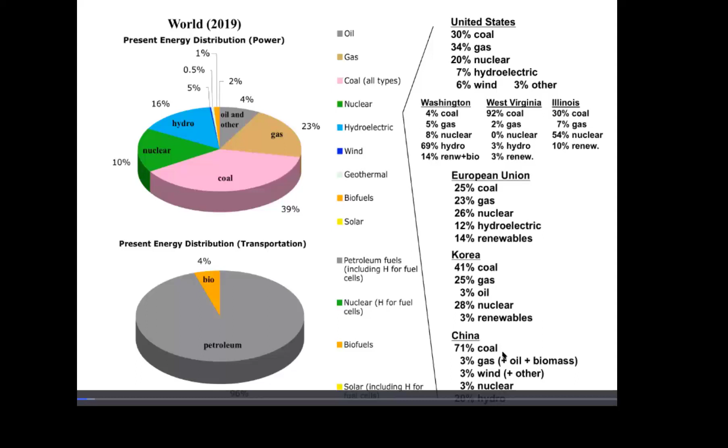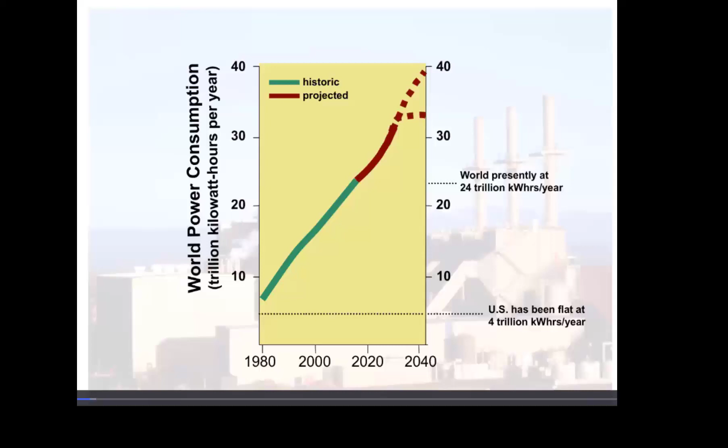So this is the world power consumption growth curve. It's very steep. It has nothing to do with the United States. The United States was last century. This is the new century, and it's everyone else but us. Presently, the world is at 24 trillion kilowatt hours. If we look at where we're going, are we going to go up ad infinitum? We're going to turn over, and I suggest about 33, 35.

So if we look at fossil fuel right now, which is 2/3 of the present 24 trillion kilowatt hours per year, if we're going to go to only 33 or so, we're going to have to come up with a huge amount of non-fossil fuel, more than all the fossil fuel we have now, simply to get to that point. That's not even cutting back any fossil fuel. So this is a huge lift, and this is what it's all about. These numbers are big, but you really need to keep them in mind.

And you have to do it all. You just can't do it in one country or another or one state or another. It's a good thing to start, but if you don't reach a significant amount of the world, then you're not going to reach this goal. Now, the reason that curve is so steep is because of these people. 1.2 billion people still have no access to electricity whatsoever. 2.4 billion people still burn wood and manure as their main source of energy, and 3 more billion are going to be born by 2040, 2045. So that's a lot of people.

And you could say, well, forget about them. We have ours. We don't want them to have any energy, which is actually kind of mean because it turns out it takes about 3,000 kilowatt hours per person per year to lift someone up out of poverty. It's what it takes. Nothing else really will do it except energy.

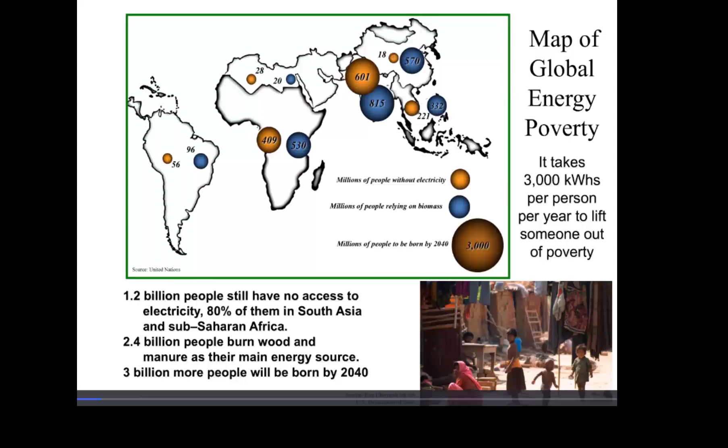So what all the climate meetings are about, especially COP21, was pretty much how to give these people 3,000 kilowatt hours per person per year without giving them coal, and then who's going to pay for it. All the other discussions were subsets of that. And it turns out this is the only way to eradicate global poverty and its evil stepchildren, war and terrorism.

So we have this basic dynamic tension between humans and the planet, and the humans simply want to live nicely, and the planet wants to survive. So we're often crosswise to that, and you simply have to find a way to do it correctly. But it's really an ethical issue: should you try to prevent people from getting 3,000 kilowatt hours per person per year, because that lifts them out of poverty.

Now, the nice thing about that is when you lift them out of poverty, the birth rate plummets. And so the best birth control in the world has always been access to energy. That's why the aristocracy always died out. Now, this is not secret. We've known this for many years. Google the United Nations Human Development Index. It's really a neat concept. And it turns out that the first term in the equation of happiness is access to energy.

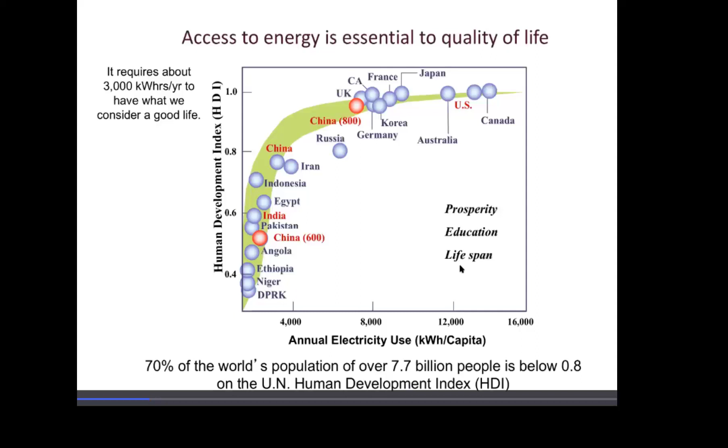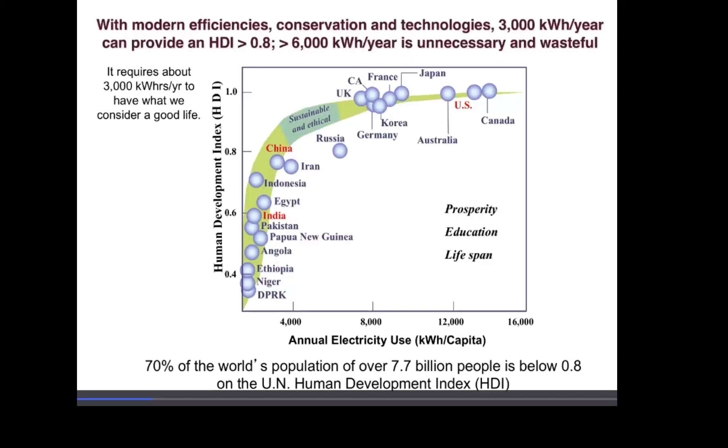Now, there is a sweet spot here. If you can get everyone down to about 6,000 kilowatt hours per person per year and everyone down here up to about 3,000, you can eradicate global poverty. And again, its evil stepchildren, war and terrorism. It's pretty much the only way to do it. And that's why energy use is going up and up.

So what do we need then if we're going to achieve socioeconomic parity and a good life for everyone, and that's what everyone is aiming for, independent of climate issues? Well, we've got to cut the industrialized world down to 6,000 kilowatt hours per person per year, kicking and screaming. That's okay. We don't need 10,000, 12,000 kilowatt hours a year. That's wasteful. But there's only about 1 billion people in this subgroup. There's a bunch at 3,000. Keep them there. That's great. We need to increase these two groups, the developing world that has 5 billion people in it, and those coming on board by mid-century, which is another 3.5 billion.

So we're talking about 33 trillion kilowatt hours. So that's why I mentioned that number. Now, this is if you equitably distribute the energy amongst everyone in the world, and we're not very good at that. So it'll take more. I would guess about 40 trillion kilowatt hours if we're going to achieve peace and prosperity in the world. Now, there's a lot working against that, but that's the goal. That's the goal from the human side.

Now, what about the goal from the planet side? This is climate change for the last 550 million years. I apologize for the busyness of the slide. In order to get 550 million years on one slide, the legend changes slightly. So over here, it's thousands of years, then hundreds of thousands, millions, tens of millions, hundreds of millions. So it's compressed as you go back, of course.

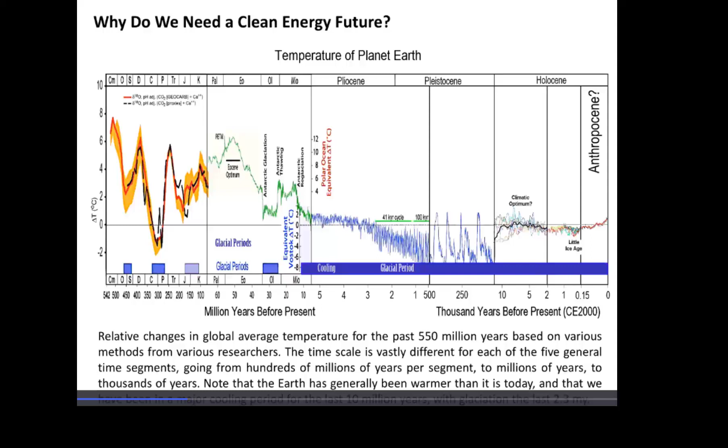So if you look at, I apologize again for all these graphs without taking the time to derive them. If you look at the IPCC's modeling, most climate modeling, you have two end members. You have A2, which means you don't do anything, business as usual. And you have B1, which is we do everything we possibly can. And as you can see, neither one's great. I mean, A2 is really horrible.

So if we don't do anything and we're business as usual, if we're still 2/3 fossil fuel in 2080, we're in rough shape. But even B1, we do everything we possibly can, we're still going to go up 2 degrees C, or 3.5, 4 degrees Fahrenheit. And all we're trying to do here is increase this difference. So we're trying to be as low as we can, but we're not going to get back to 1850. Just not anytime soon.

And you all probably know why: because the half-life of CO2 in the atmosphere is anywhere from 30 to 300 years, depending upon the degradation route. So that's tricky. So again, when we talk about COP21, Paris, or any of the others, pretty much the big question is who's going to pay to implement B1? That's the big issue. Who's going to pay for it? How are we going to do it?

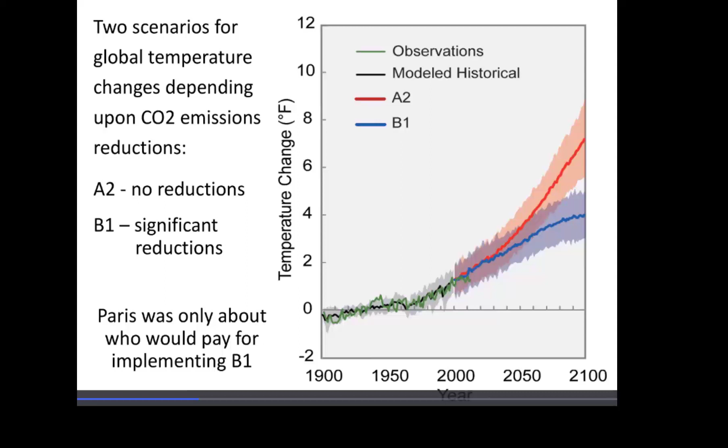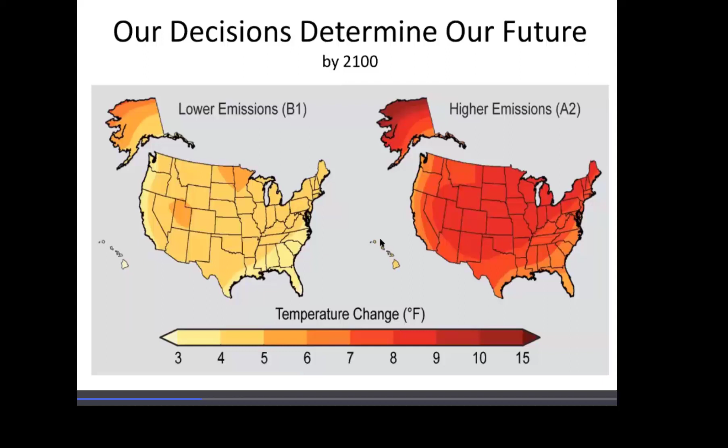Now, you probably also encountered people that say, well, if there's more CO2 in the atmosphere, things grow better. It's like, no, they don't. All things equal, they will, but all things are not equal, because the temperature has much more effect on the yield of a crop than the CO2 concentration. So as the peak temperature during the growing season goes up, the yield goes down significantly.

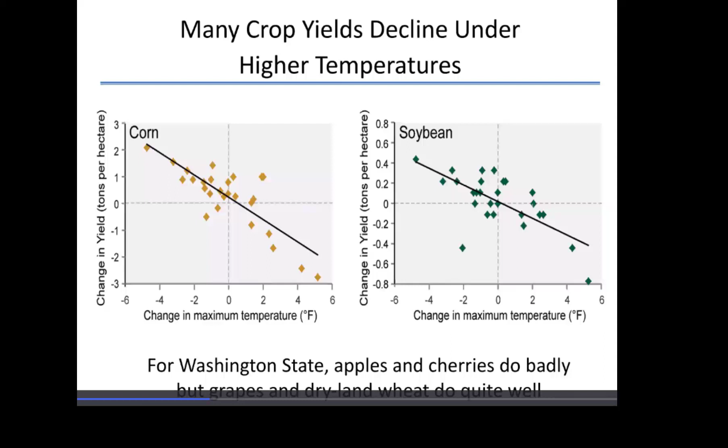So for Washington State, it doesn't matter, A2 or B1, apples and cherries do badly, which is horrible because we are the biggest exporter of apples and cherries in the country, if not the world. But grapes and dryland wheat do quite well. So the wine industry is fine. Don't worry. But yeah, so again, as this all evolves, of course, you have to make smart choices on what kind of crops you're going to grow. And in the Tri-Cities, that's important. In Washington State, it's incredibly important.

Now, last climate slide. This is the IPCC's projections of how to get to B1, how to keep the climate change to within 2 degrees Celsius. So what that means is that in 2011, we would have had to be decreasing anthropogenic carbon emissions by almost 4% per year, but we could still have some by mid-century. Well, we blew that one. So 2015 comes around. Now we have to decrease 5% per year, and we have to go basically to zero by 2045. Well, we blew that one.

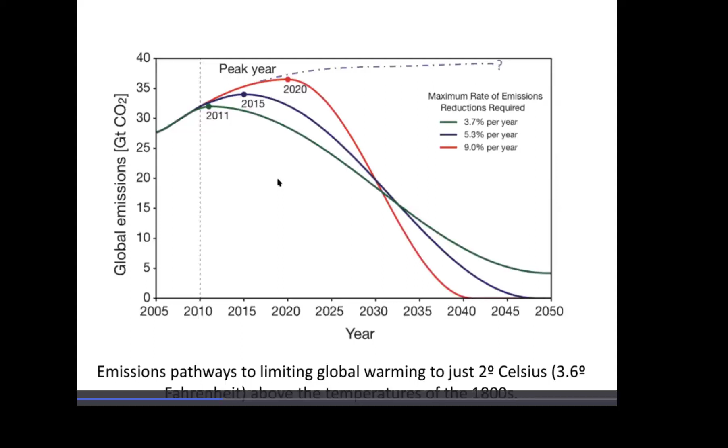So now we're in 2020, and we're supposed to decrease carbon emissions by 9% a year and go to zero by 2040. That's why everyone says we only have 10 years, because, yeah, we only have 10 years. And that's a pretty big lift. So, again, if we weren't all muted, I would ask, so how much have we been decreasing a year? And everyone would answer, none, because we are not decreasing, and this is very bad. In fact, every major projection I've seen has us going up at least until 2045. And that's ridiculous. We can't do that. We will just fail if that happens.

We can't have these, but if we throw these out, if you don't like hydro, you don't like nuclear, you don't like geothermal, you don't like wind turbines on Horse Heaven Hills, if you just don't like something and you say, well, we don't need that, then you really are not paying attention to the numbers. The numbers say we need all of these as much as possible. So that's what the rest of this talk is going to be about.

And again, if you talk to Jim Hansen, Kerry Emanuel, all the big climate gurus, pretty much they say you cannot do this without nuclear energy. They should have also put in there, you can't do this without solar, you can't do this without hydro, you can't do this without any of these down here. Okay.

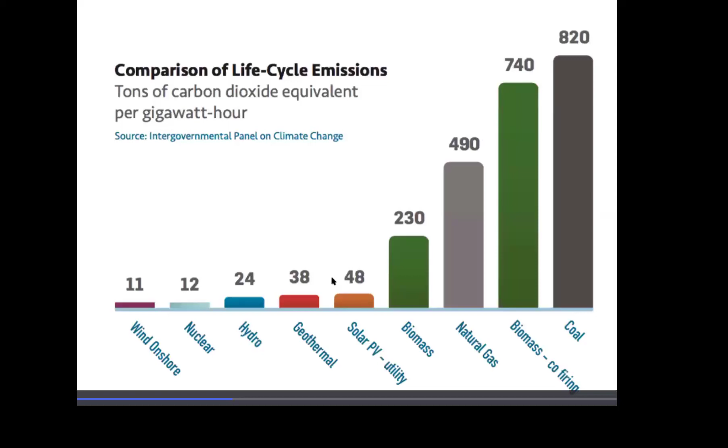Now, of course, a lot of people say, well, we've been pretty good in the United States at decreasing our CO2 emissions. We're at a 27-year low. Yeah, I know that, but it has nothing to do with what we think we're doing. It has to do with replacing coal with natural gas. We've been doing that dramatically.

And again, it actually went up for a little bit in 2018. And of course, the pandemic is a horrible reason to decrease, but it's also decreased. But that will turn around. So again, this is billions of tons of emissions from the United States, and we're continuously going up. And then we started in 2006, and I'll talk about why that was the case, started decreasing significantly as a result of replacing coal with natural gas.

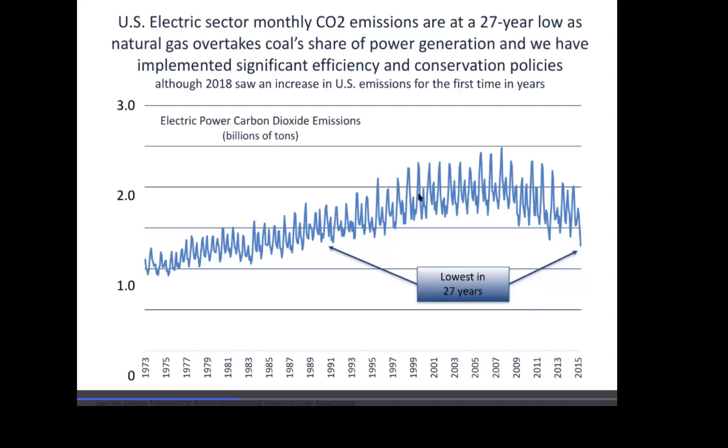And the reason is because we have an awful lot of natural gas. We have an awful lot of everything, actually. We have more fossil fuel than any other country in the world, period. Much more. And that's because in the old days, in the 70s and 80s, when we were in college and graduate school, we'd have to calculate the Hubbert curve, okay, the peak oil, peak coal, peak gas. And peak oil, and peak anything, is calculated only for those things that are economically recoverable at that time.

Okay, so in 1970, we would drill a well, and that's it. Okay, now beginning in 2006, we started drilling multiple wells, so we started fracking. So we would have 12 stringers out from a single well. And it just got too easy to get the stuff out. And as a geologist, I never would have thought we'd get anything out of tight shale. I mean, you just couldn't get anything out of it. Now we can. So things change. Technology changes things dramatically. In this case, it's changing it for the worse.

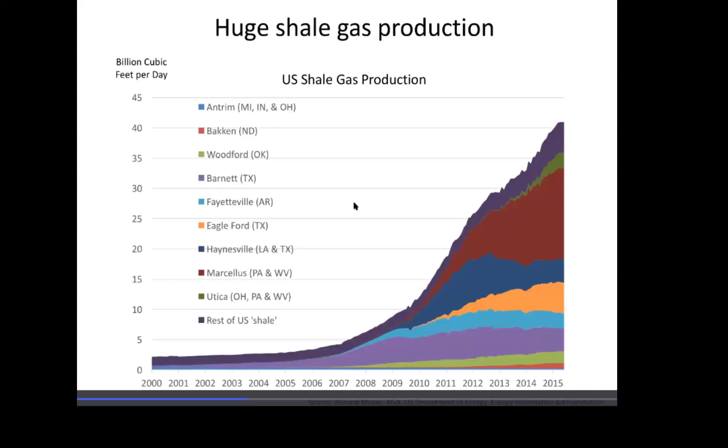I just want to throw in, this is a Patterson drill rig. It's a walking drill rig. Now let that sink in. This thing picks itself up and walks to the next site. Now, from a science fiction standpoint, that's great. It's really cool. From an environmental standpoint, that's horrible. Okay, it means it's even cheaper and easier now to get stuff out of the ground.

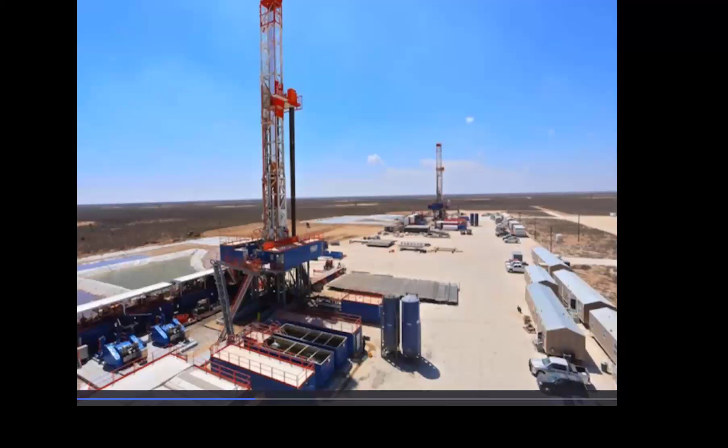And each one of these puts down a well 18,000 feet, and then can put 12 stringers off into a mile. Now, it's just too easy to get the stuff out of the ground. So you cannot wait for the idea that it's too hard. We're running out of oil. We're running out of gas. We're not. We won't run out. The peak oil is now 500 years out. We just have so much oil that no one has ever thought we could get out of the ground. That's what's key here. So it's going to take a political will that is really massive to counter the fact that it's so easy to get this stuff out of the ground.

So with that, I've set you up. What's the fastest growing energy source in the world?

I usually say, just shout it out. Can you unmute everyone, Steve? Or can I unmute everyone? Well,

I'll give you the answer. Terrible. It's oil. It's oil and coal and gas as well. So, I mean, this is terrible. This is not the direction we need to be. Okay, now renewables are coming up. That's great. I love it. But they're not coming up anywhere near as fast as fossil fuels. And you might say, well, why is that the case? This is the world now. This is global. This is not the United States, although gas is leading the United States as well.

It's because, especially coal, it's not the cheapest source of energy. But if you are a poor country with no infrastructure to speak of, coal is all you can do. It doesn't require a lot of infrastructure. Every single other source requires significant infrastructure. So right now, China's One Belt, One Road policy, you probably heard of that, they're spending almost $2 trillion on infrastructure in Africa and Southern Asia in order to install coal. Because it's easy, and they have a lot of coal.

They want to sell it, and they want to economically and politically bind these developing countries to them. And this is the best way to do it. I mean, it's actually brilliant. Horribly brilliant, but it's brilliant. So again, coal is simply easy to do. It is not the cheapest. It's simply the easiest if you have no infrastructure. Natural gas, you need pipelines; renewables, you need high voltage transmission lines. I mean, you need a lot of things for all of the other sources. You need the least with coal. So that's something that is driving this, that is not, again, what you think of usually as why.

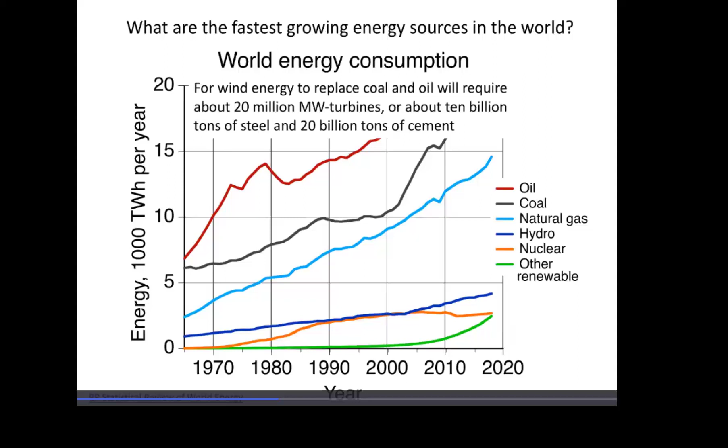The thermal sources don't require much, but just look at gas. Gas doesn't take anything. That's why you can throw a gas plant up in a year, because it just doesn't take anything. It takes 3 tons of steel. I mean, think of that, 3 tons of steel. Whereas wind turbine per megawatt takes 450 tons of steel just for one wind turbine.

So this is important. So if we're going to build the renewables out, and also nuclear, we're going to get rid of coal and gas. That means we're going to have to come up with a material plan to do this, because it's just not going to happen on its own. So you're going to have to triple the amount of iron mining, which is not trivial. You're going to have agreements that we're going to save a major portion of the steel production in the world to go to renewable sources. So again, this is not a trivial issue. To me, this is one of the great hurdles that has to be overcome in order to meet any kind of a Green New Deal plan.

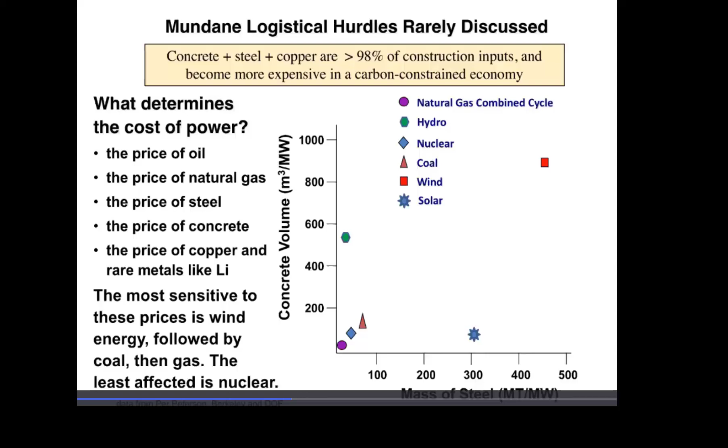So any energy plan that has any hope of achieving any of the emission goals we need in the time frame we need them, basically the green part of the Green New Deal, must have some form of the following. So I'm going to lay out what we need. And yes, it's not set in stone. I mean, when you project this far ahead with these huge numbers, there's a huge amount of slop in it. But if you don't have some sort of this, you're going to fail.

So we need to stop building new fossil fuel plants. Now that may seem obvious, but we're not doing that. We're still building a lot of new fossil fuel plants. You cannot stop fossil fuel while still building fossil fuel plants. I mean, that doesn't take rocket science to understand. The problem is every new fossil fuel plant you build locks you in to fossil fuel for about 40 years. No one is going to decommission a fairly new gas plant.

Now, coal, we're not building coal, but again, as I mentioned, the developing world is building coal like crazy, but we're not building coal, we're building gas. And you say, well, gas is a bridge fuel. Okay, bridge fuel, but bridge to what? I mean, we're talking about 2040. If you build a bunch of new gas plants between now and 2030, those gas plants are going to be running in 2040, no question. So you have to stop building new ones. And that's going to be tough because that's all state legislatures like, is natural gas.

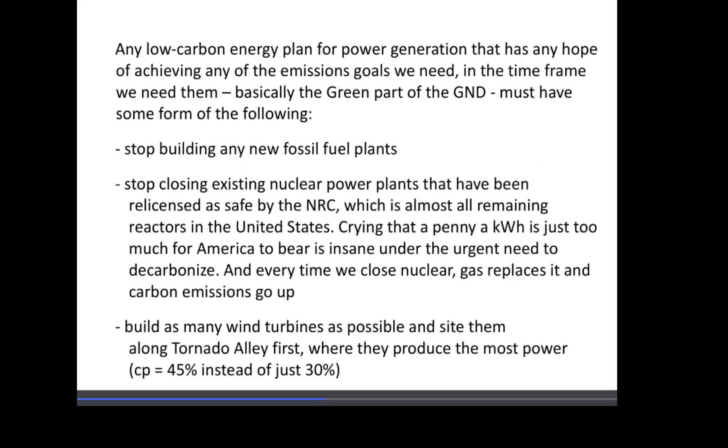Now, do you all know what capacity factor is? Okay, it's the percentage of the time that the power plant is producing what it's supposed to produce. So a 1 megawatt wind turbine produces 1 megawatt if it's turning at 30 miles per hour all the time. That doesn't happen. But out here in the Horse Heaven Hills, the capacity factor is about 27%. In Tornado Alley, it's 45%. So you're getting a lot more energy out of the same unit, out of the same amount of steel, out of the same amount of time. So that's why it's important to do that.

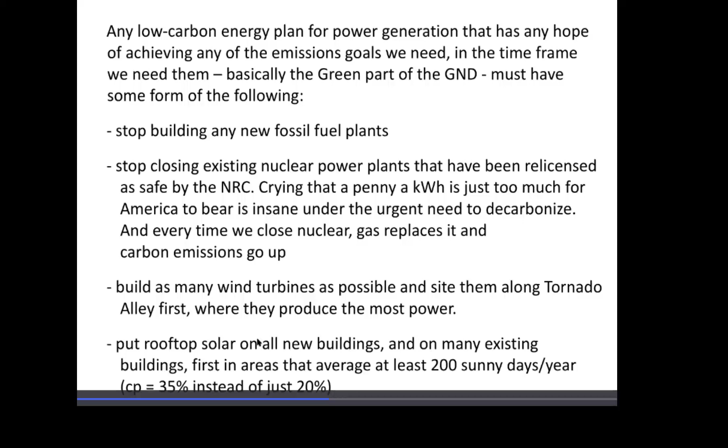So the same thing with solar. Put rooftop solar on all new buildings. If you put solar on a new building and you amortize the cost of that over the mortgage of the building, you won't even feel it. Now retrofitting, I retrofitted my roof with solar panels. That's fairly expensive for most people because you're retrofitting it. But if you put it on all new buildings, you won't even feel the cost of that. But again, you need to do it in areas that have a high capacity factor, at least 200 sunny days a year. So we're talking about the red and orange.

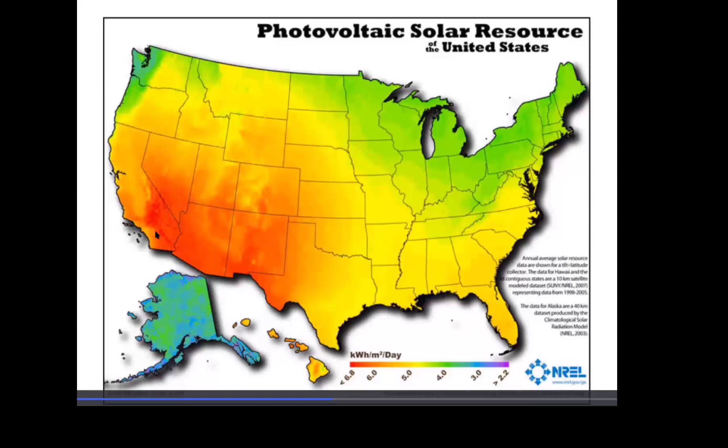Okay, now here's Tri-Cities. That's why mine's okay. That's why the new solar array that's going up for Energy Northwest is going to work very well. But if you're putting solar panels out here or up here, you're wasting steel. And we don't have a lot of steel to waste. Certainly don't want them in Alaska.

And build small modular reactors as fast as possible. They can't melt down. All the scary stuff has been fixed. We have not been idle in the last 30 years. And SMRs are built to load follow or buffer renewables instead of building new natural gas plants. So it's either SMRs or gas or hydro. That's all you have to load follow. Now, Texas actually load follows a bunch of their wind farms with coal, which is horrible. Ramping coal up and down is really dirty.

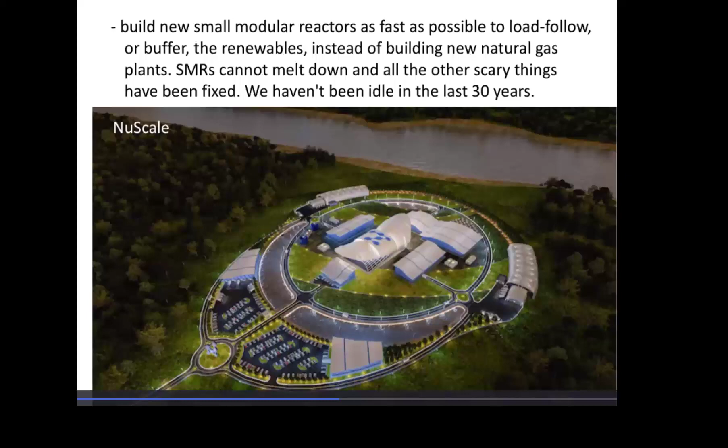And of course, you probably heard of NuScale down in Oregon. Brilliant, it's already approved. Been there lots of times. Again, it's great. And the first one should be built in Idaho, basically to load follow the wind farms of the Utah public utility, UAMPS.

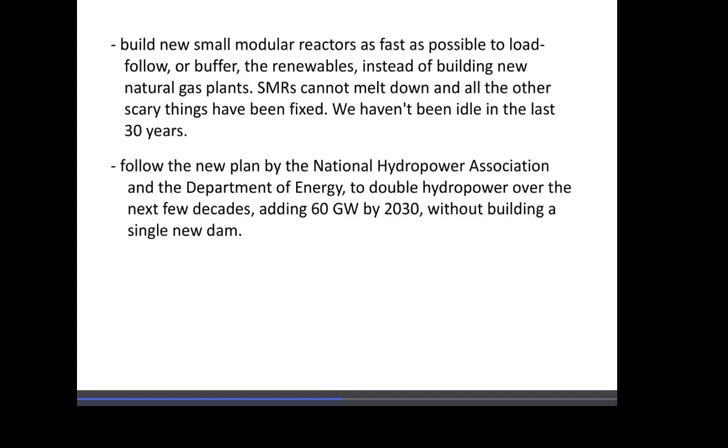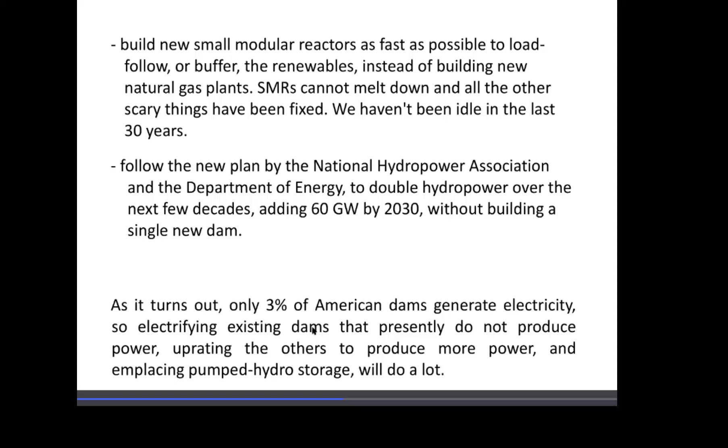It's either natural gas, small modular reactors, or hydro. Those are the only things you really can load follow correctly, given the intermittency of renewables. So if you're going to start building a bunch of renewables here in Tornado Alley, you better have a bunch of hydro or a bunch of small modular reactors to load follow them, to buffer them. Otherwise, it's just going to be gas.

I mean, you probably remember T. Boone Pickens. He recently died, but he was touting wind. He was a gas man. I knew him from a long time ago. He didn't care about the environment. He didn't care about the planet. He bought up all the water rights in Texas along the areas that were going to put wind in because he's a gas man. He knew when you install a significant amount of wind, you need gas or hydro or small modular. So, if you don't do this, you'll have much less ability to load follow the renewables you have to put here.

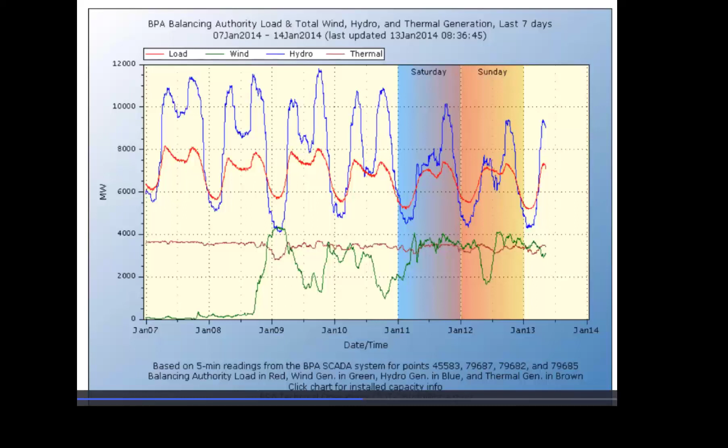So when wind comes up, suddenly you have to drop hydro dramatically, and when it goes away, you raise it up. So we only use hydro in this region to load follow renewables. So hydro is a really great thing to have. If you're going to be putting in a lot of renewables, hydro is great. You can't start taking out hydro thinking, okay, we don't like hydro, so we're going to take that out. Well, then you're going to be stuck with natural gas, and you'll never reach your carbon goals at all.

If we're going to build alternative electric vehicles, which are the best? I mean, hydrogen's okay. It's not very good. Methane is still methane. But really, electricity is the most efficient fuel for a vehicle. It's about 4 times more efficient than oil, than petroleum. So if you're going to do that, again, materials are an issue. Lithium, cobalt, iron, and other materials, neodymium. You're not going to do this unless you secure large sources of these. And right now, we buy these mostly from China.

Now, we have rare earth element mines in the United States. I used to know one down in Southern California, but China pretty much, with government assistance, undercut every rare earth element mine in the world. And so they all shut down. So again, money's important. I get it. We're America. Everyone's going to make a buck. I get it. But you need to get sources of these materials, even if they're not competitive with China. The point is not only to make money. I mean, you're going to make money, but the point is not just to make money. You simply need sources of these materials. And if they cost a little bit more in the United States, you have to bear that if you're going to meet these goals.

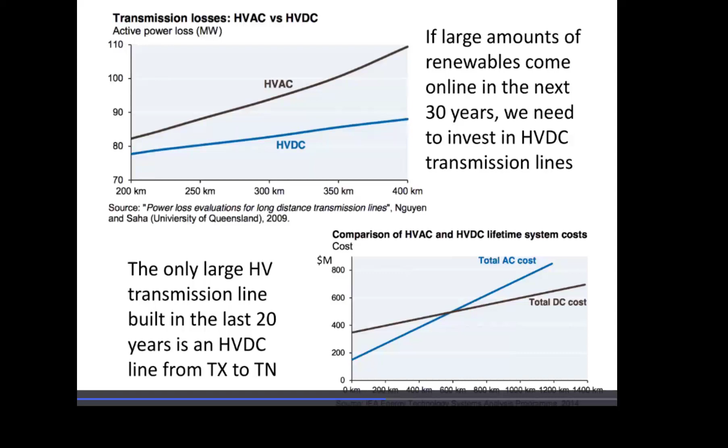So to bring this all together, in America, this new low carbon plan will require 500,000 new megawatts of installed wind turbines that will produce 1.75 trillion kilowatt hours a year, 200,000 megawatts of new nuclear reactors, small modular reactors, to produce 1.58 trillion, 300,000 new megawatts of solar, and 120,000 new megawatts of hydro.

With the existing hydro, these big dams are going to last a long time. And again, this gets you up to where we'll be about 5 trillion kilowatt hours in America by 2040. Now, that's just America. For the world, you pretty much multiply everything by 7. But I'll get back to that.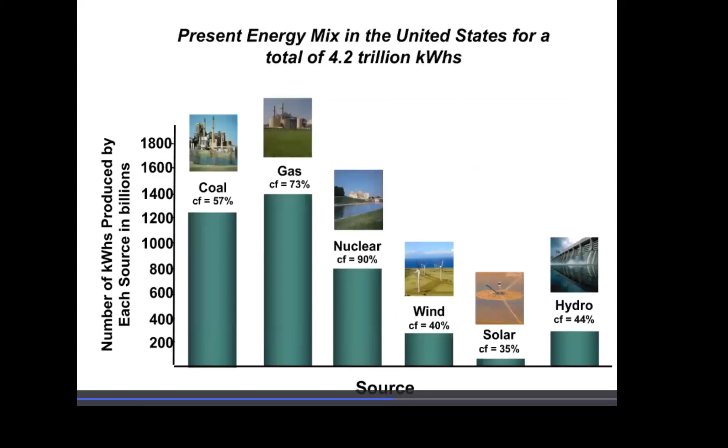So the present energy mix in America is this, and we need it to go to that. So very simple. This is where it is now. We need to go to this, or some version of this. I mean, it doesn't have to be exact, of course, but it has to pretty much get rid of coal.

The reason I have some gas here is because these are the new gas plants being built now. Again, if you let more gas plants be built, you're going to lock yourself into gas for the life of that plant. So this is by 2040 for a mix to produce 5 trillion kilowatt hours. And there's going to be some gas because we are still building gas plants.

My fear, of course, is that this gas is going to be up here. That's the true fear. And it's most likely that's going to be the case. So pretty much gas will be where nuclear is if we don't exert some extreme political will. And this is hydro if we just electrify non-power producing dams without building a single new dam.

Now this in America will take about 500 million tons of steel. That's not too bad. But again, the United States only produces about 70 million tons. We don't produce billions, we produce millions. So again, we're going to either have to increase our mining and our production of steel, like we used to, or we're going to have international agreements to secure the amount of steel we need for that.

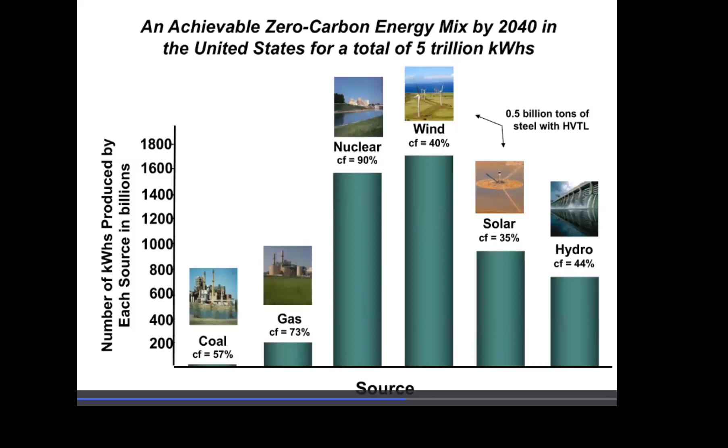Okay, oh my God. All right.

Barbara, what about nuclear waste? Now that's a whole other talk, but it is my specialty. Nuclear waste is a piece of cake. We know exactly what to do with it, how much it's going to cost. We're just not allowed to do it. And what we are doing is stupid. So that's a scientific term for those of us in the business.

But yeah, so get me back to talk about nuclear waste, because that's actually fascinating, much more fascinating than you think. So what's going on out here at Hanford is not at all what you think. What's going on with Yucca Mountain is not at all what you think. We know what to do. It's not that difficult. It's fairly cheap. We're just not doing it. So very, very important. Okay.

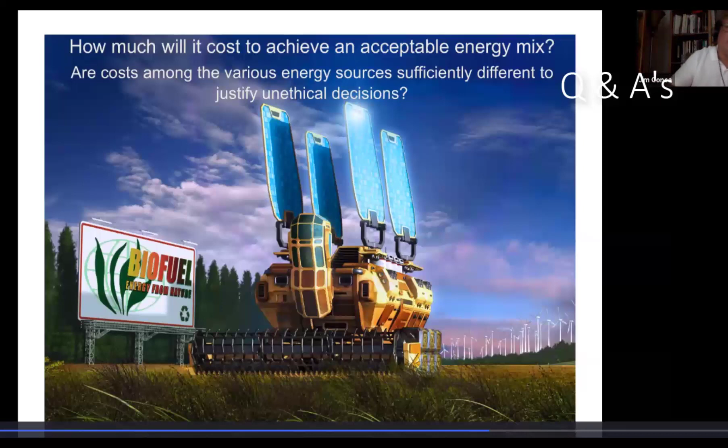Okay, so this is an interesting study out of Rice University and UT Austin in Texas. Energy has never been cheaper than it is now. All right. Now, can everyone see the end of this curve here? Now, you pretty much, as a percentage of GDP. Now, of course, before 1850, it was all muscle work and food essentially. Windmills and water wheels and things like that. But come 1850, this huge drop is, of course, the result of coal and everything else.

Now, there's a little peak here that is the '73 oil embargo that many of us remember. I went from paying 32 cents a gallon to $2 a gallon in a month, and I freaked out since it was my first car. So anyway, it's never been cheaper than it is now. And as a result of that, food has never been cheaper than it is now. So if you're going to make these super changes, now is the time to do it, because it won't always be this cheap, or it shouldn't always be this cheap. So again, you're going to make huge changes, and when you do that, it's good that energy is cheap now.

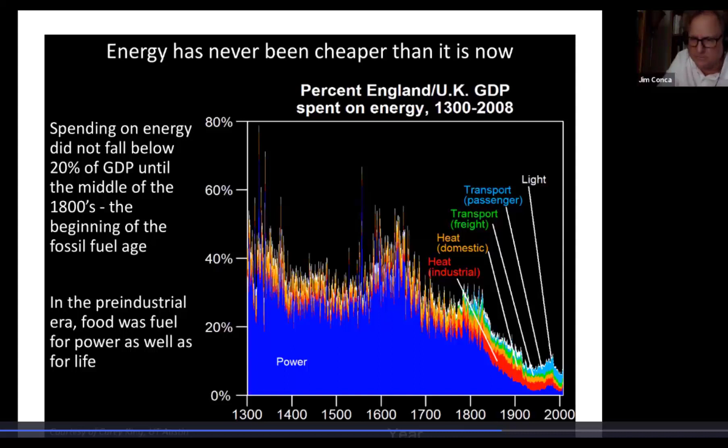So how much will a new energy mix cost? I'm just going to use the levelized costs. I hate levelized costs. I don't know if you all love them or not, but I hate them because they have a lot of junk in them that isn't real, that isn't actually technological or scientific. They have depreciation costs from banks. I don't care about that. We don't finance this stuff very well anyway. So you need to decide what you want and then how you're going to finance it. You don't start with up-front financing, because venture capitalists will gouge you in the first 5 years and we'll never get to any kind of a mix that we want.

So I'm going to use these levelized costs per kilowatt hour from the Northwest Inter-Resource, I can't remember what IRP is, Inter-Resource Plan. And pretty much what this shows is, gas is the cheapest. We know that. Coal is actually the most expensive. Now, this does not include subsidies. But what's funny here is that everything is within a cent of 6.5 cents or so. That's not a lot of difference, especially since in most places the energy cost is so high; if you're in Vermont, it's 18 cents a kilowatt hour, but these are still the same.

So what's all that money coming and going? How come the price is so much more than the cost? Cost and price are not the same. Price is what you can get away with charging. Cost is what it actually takes to produce a kilowatt hour of energy from that source. Okay, so that's actually key.

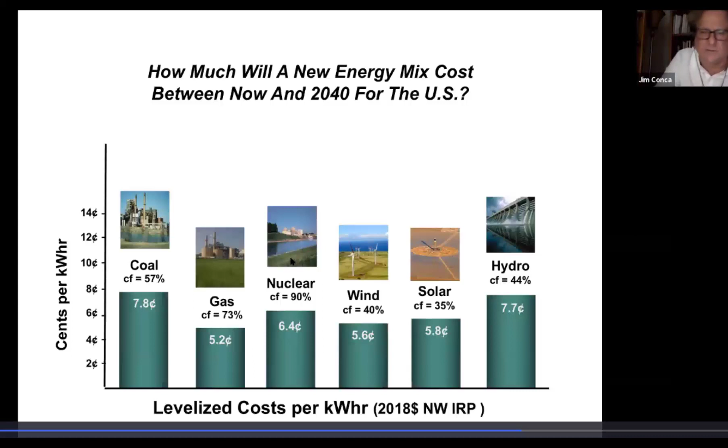So this is building an old nuclear reactor. We're not going to build any of those anymore. We're going to build SMRs, and they're going to be a lot cheaper. But again, we're just going to use this.

So if we use that to produce 5 trillion kilowatt hours a year by mid-century in the U.S., with the present mix, which is 2/3 fossil fuel and 1/3 everything else, it's going to cost 9 trillion, of which 1.7 trillion is capital. Now that sounds like a lot of money, but by mid-century, that's not that much money. Actually, that's pretty good. And so this is business as usual.

Now, the reason it costs so much is because you have to pay for gas and coal and oil, and you don't have to build a lot because fossil fuel is mainly all about the fuel. But again, you have to build new gas plants, you have to build wind farms and things like that. So the 1.7 trillion is capital investment, and most of the 9 trillion is other, like fuel.

Now, if we do that with this mix that I'm proposing, renewable, hydro, nuclear, it's going to cost 9 trillion. Exactly the same, 9 trillion, of which 4 trillion is capital. So now instead of 1.7 trillion, you're going to have 4 trillion because now you're building things and not buying as much fuel, right? So you're not spending all your money on natural gas or oil or coal. Now you're spending it on steel and cement, things like that. So that's why the capital is so much, although the total cost is the same.

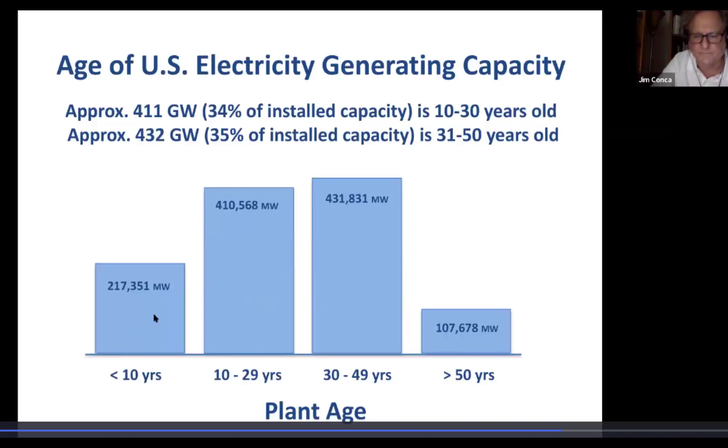Now, what about the other costs? The costs that are not direct. You've probably heard, oh God, what's the term, Steve? Anyway, the other externalities, external costs, externalities. They're not direct costs. They don't come at the end of your month in the bill, but someone's going to pay for them at some point. Either your grandchildren, polar bears, someone's going to pay for it, but they're real costs. We don't really know how to capture these.

We say, okay, we try to assign a cost per ton of CO2, maybe $15 a ton, $40 a ton, whatever you want to assign that as a value. The EU has assigned $100 an acre for physical footprint, which they just pulled right out of the air. There's no real reason for that, but okay, we can work with that. So if you look at that, I put over here a carbon tax of $15 per ton of CO2 emitted per generation source, and what that increase is going to be for

that source. So obviously, a carbon tax hurts fossil fuel because it's all about the fuel. It's all about carbon. Not much carbon here, although not trivial. Nuclear and wind have the lowest carbon footprints because of the construction. It's all construction. CO2 for solar is actually kind of big because of the solvents used to make them, and of course, hydro is big cement. Plus a fair amount of backwater methane generation in the water behind the dams, which is important in the east, but not that important out west.

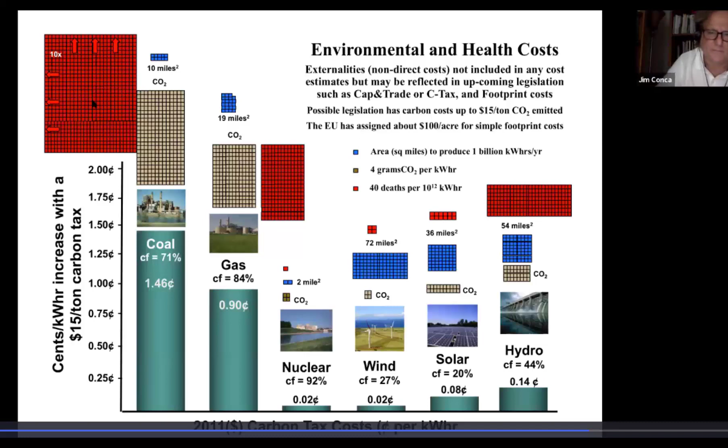These here for solar, wind, and nuclear are simple accidents. So falling off a ladder, breaking your neck, falling off a wind turbine during maintenance. This in nuclear in the last 5 years was someone falling off scaffolding and broke his neck. So these are just accidents. This is mega accident, and these are health effects. Now, these are the numbers that go into that death print. This is mortality rate per trillion kilowatt hours, so it's normalized. The global average, about 100,000 people die per trillion kilowatt hours.

And since coal produces about 8 trillion kilowatt hours a year, that's 800,000 dead a year from coal. That's not a trivial amount. Coal in China is even worse, of course. They've gotten a little bit better. 10 years ago, this was 250,000. The United States, we only kill 10,000. That's not bad. Supposed to get a laugh. It's terrible, okay? But hey, it's not as bad as the rest of the world. Oil's not great. Now it starts going down.

The World Health Organization recently concluded that biomass in the third world was an epidemic because of poor ventilation in third world countries where they're burning biomass indoors. So this is not trivial either. And then again, all of these are just accidents. Now, what's funny is that for coal, hydro, and nuclear, I have a global average and then I have a U.S. number. Why are we so good in the United States at not killing people at the same levels as the rest of the world? Usually I say, shout that out, since you all probably get it: regulations.

Regulation. So this number here is a result of the Clean Air Act. So when I hear people talking about changing the Clean Air Act, I want to kill them. Sorry. But yeah, the Clean Air Act is arguably the single piece of legislation that has saved the most lives in history.

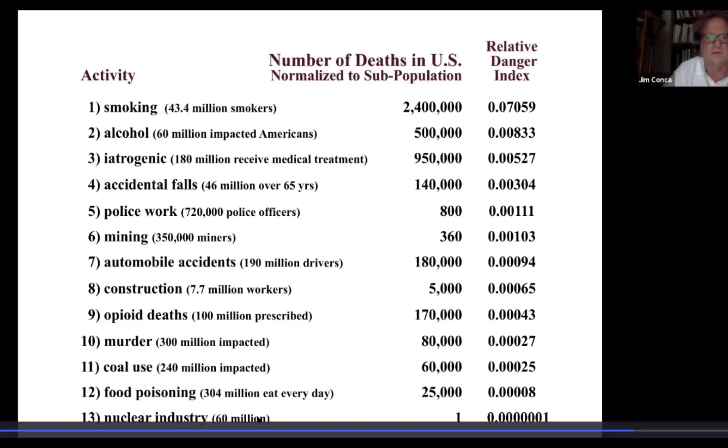Now, even non-lethal accidents like falling off a ladder, it's safer to work at a nuclear power plant than it is to sit at a desk trading stocks. Now, this is all OSHA. This is all real data. Now, why would that be? And usually, again, I ask the audience or the class, and it's the same answer as the previous question. Regulation, regulation, regulation.

So trading stocks is not inherently more dangerous than nuclear power, okay? But it's just no one is thinking of safety at an office building. So at a nuclear power plant, I mean, when I used to work out at Hanford or even at Los Alamos, I had to take ladder training.

I didn't know that much about ladders. It was an interesting course. I kind of found it fascinating, but ladder training. You cannot operate a ladder on a nuclear site without two qualified operators that have had ladder training. So do you think anyone ever falls off a ladder at a nuclear power plant?

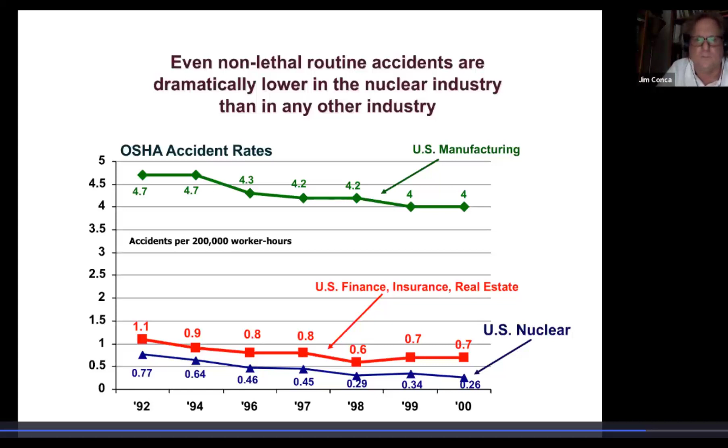Of course not. But at the 8th story of the AIG building in New York, someone is standing on a rolling chair, hanging a picture, and they fall and they break their arm, and it gets reported to OSHA, and that's what these numbers are. Now, of course, this is really inherently more dangerous. Pouring 500-ton ingots of molten steel is actually quite dangerous, and so people tend to die more or get hurt more.

So why is everyone so afraid of nuclear energy? And the answer is because we told you to be. Sorry, my bad. Yeah, we've been telling you for 50 years to be really afraid. It was one of the reasons for the Cold War. It was intentional but incorrect association with nuclear weapons during the Cold War. We meant to scare everyone so no one would use nuclear weapons, and it kind of worked.

Inaccurate, purposefully simplistic modeling. We can't get into the linear no threshold dose hypothesis here, but it's really the real reason why everyone's so afraid, and it's incorrect. It's not scientifically based. And then misunderstanding of the amount of nuclear power waste, spent nuclear fuel. People always come back to that. It's just not much of it. We're talking about one landfill.

All the nuclear waste in the world, weapons waste as well as commercial waste, would fit in one big landfill. I know it's weird stuff, it's odd stuff, but it's just not much of it. The amount of toxic solid coal waste produced every 30 minutes equals all of the nuclear waste ever produced in the world. So volume really makes a difference. And we know what to do with it, but get me back, Steve, to talk about nuclear waste.

Okay, so for the world, this new low-carbon plan will require 4 million new megawatts of wind turbines, 1.4 million new megawatts of reactors, 2.2 million new megawatts of solar, and 1.1 million new megawatts of hydro, or some variation of that. But if it includes a lot of gas and coal, then we will fail. It's just the way it is.

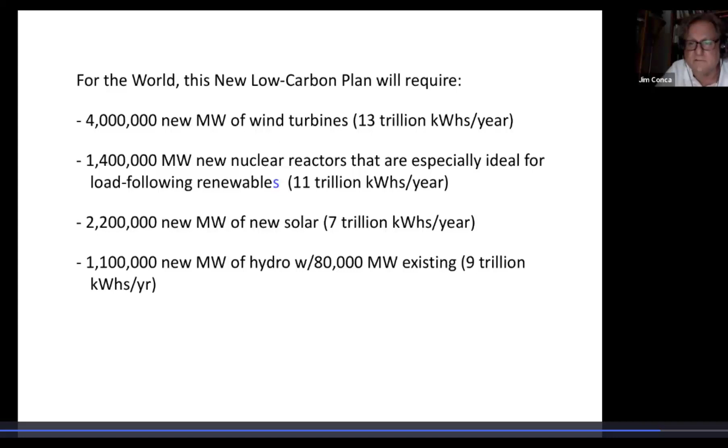What is keeping modular reactors from being more acceptable to utilities? From Laura. Pretty much the same thing. It's fear. Also, it's investors, because that's why everyone loves gas, because as I mentioned, you can throw a gas plant up in a year. So an investor can get real return in the next 5 years. So for utilities, that's a good investment economically. Nuclear, who knows? We haven't built one in so long.

So, UAMPS is probably going to build the first small modular reactor. It'll probably be built by 2025, probably, if all goes well. All right, that's not real confidence in terms of investment. So that's why you need government support for anything that's new. That's why wind and solar benefited incredibly from government support over the last 10, 20 years. You need that in order to get over the hump of building.

Once you build the first one or the first 10, then suddenly people have confidence that, yeah, this works. But until you get to that point, I wouldn't expect utilities to be jumping up and down for SMRs. That's why the NuScale one really has to get built in Utah and on time, and I think it will be, because it's a brilliant design, and the NuScale people are brilliant engineers. So that's why.

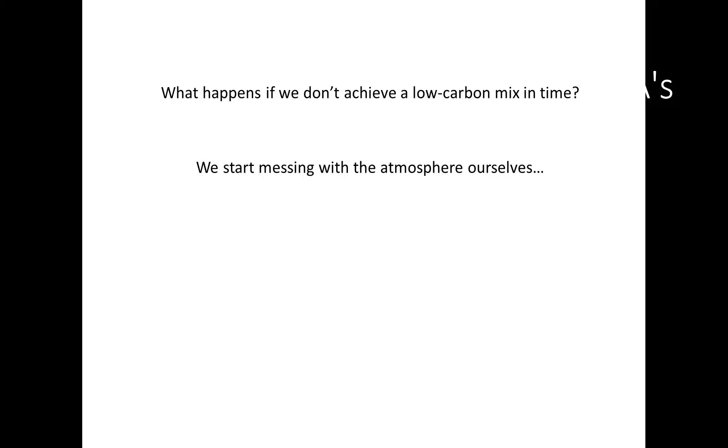Oh, okay. Yeah, so then we have to actually take direct action in lowering the temperature of the atmosphere. So we actually have to shoot small reflective particles, which sounds weird, into the atmosphere, but it's what a large volcano does all the time. As a geologist, we know that when Krakatoa erupted, the global temperature dropped 2 degrees for 2 years. So we know how to do this.

And of course, smoke and soot is not what you want to shoot up there. Probably ground mother of pearl, which is actually brilliant. And after 4 years, it falls into the ocean, which can address ocean acidification a little bit as well. So we have the ability to do this. We just have to put the research dollars into how to do it well.

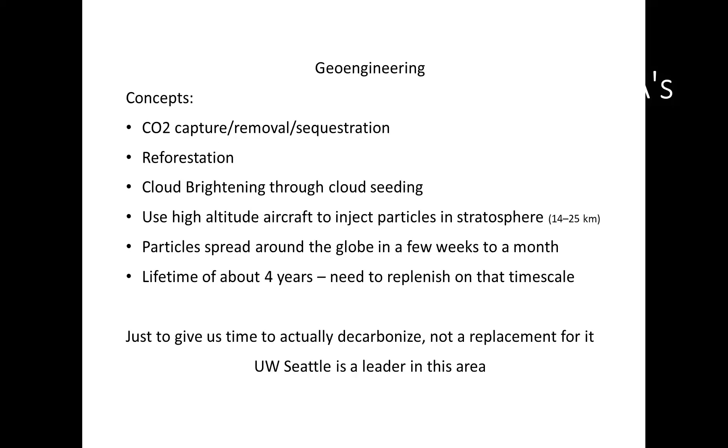Okay, so I misunderstood. I thought you were going to say if we don't do this, we're all going to die. No, unfortunately, humans are ornery. We don't die very easily. I guess it's good, but it's kind of a bummer from a planetary perspective. I mean, the Black Death doesn't even register on the population growth curve, and it killed a third of Europe. But it didn't change the growth curve of human population. It's really hard to kill us, I guess, is a good way to put it.

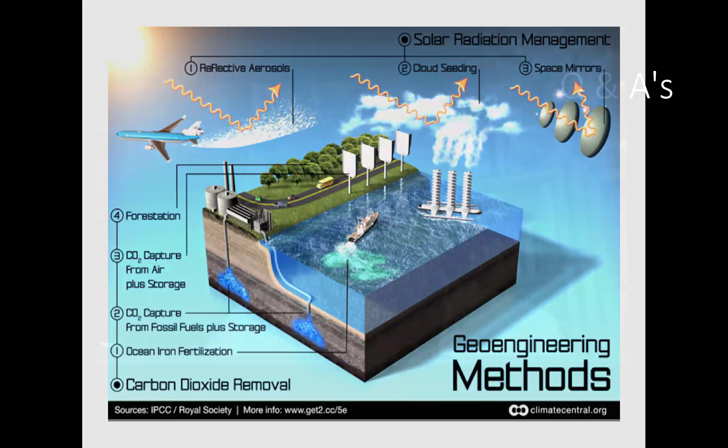Sue Kane had a question, Jim. Is this presentation common knowledge to scientists and policymakers? No, but it should be. Some parts of it are. I mean, this is the kind of stuff that Jim Hansen talks about and others. Even Bill Gates has given a version of the first part of the talk, the HDI part, and why we need so much energy. And then he segues into what that should be.

So, people know this, but they don't have it all in one place. And if you don't think of it in holistic terms, you're just not going to get the gist of what we have to do and how difficult some parts are and how easy some parts are.

But other people have. I mean, if you go and look at, like, Berkeley people: how much do you have to price carbon to make a difference? And they came up with pretty much it has to be $40 a ton or more. Below that, the fossil fuel industry just absorbs it. It doesn't cause any real change unless it's above $40 a ton. If you don't price carbon in some way, then, as far as I'm concerned, the alternatives don't get in because there's no financial incentive to do it.

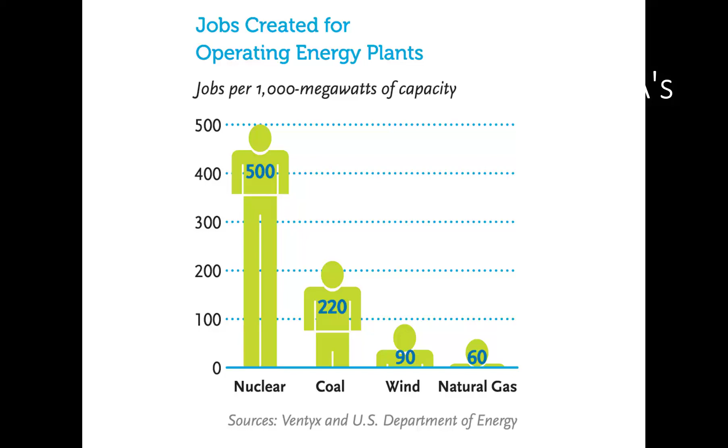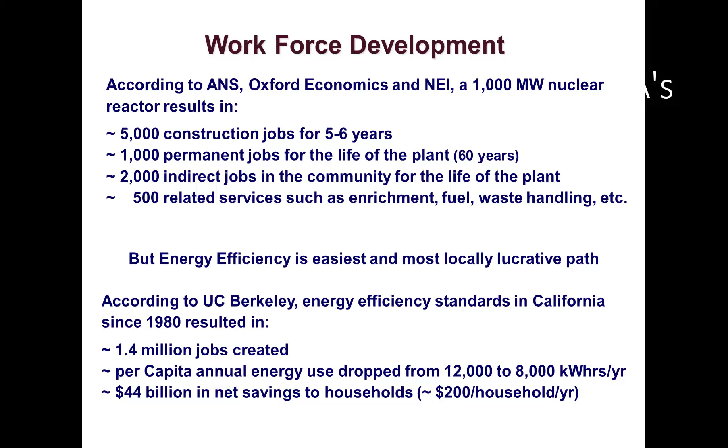So if you're producing a lot of energy, you're going to have a lot of jobs downstream, and it doesn't really matter what jobs you're creating that energy with. They're small in comparison, and it doesn't matter what source you're working in. So I mean, jobs in the oil industry pay really well. Jobs in the renewable industry pay really well. Jobs in the nuclear industry pay really well. They all pay well. There's no crappy job in energy. Unless you're a janitor, but even they pay well. So, people talk about great jobs. It's a red herring. It's not that important. Any energy source you put in creates jobs.